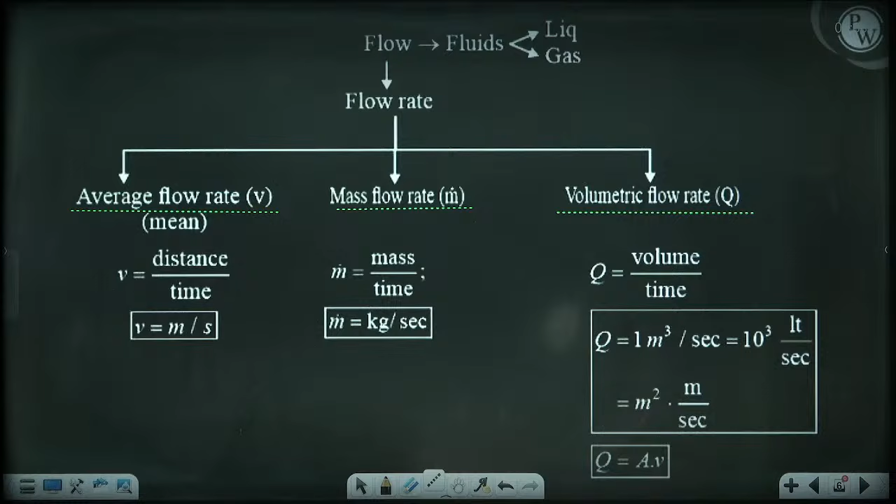Chalo, if you see the average flow rate, average flow rate ka units aayega distance per time, that is equal to meter per time, meter per second. Mass flow rate ka unit aayega mass rate, that is m dot, mass per time, kg per second. Volumetric flow rate ka units aayega how much volume is traveling per time, so that is V by t, that is meter cube per second.

So 1 meter cube per second is equal to how much? 10 to the power of 3 liters per second.

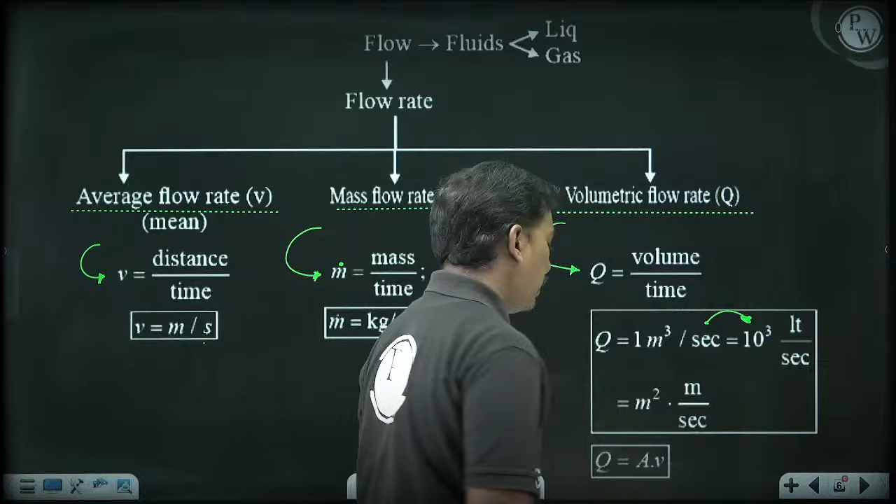So this quantity rate, I can write it as area into velocity. Q is equal to area into velocity.

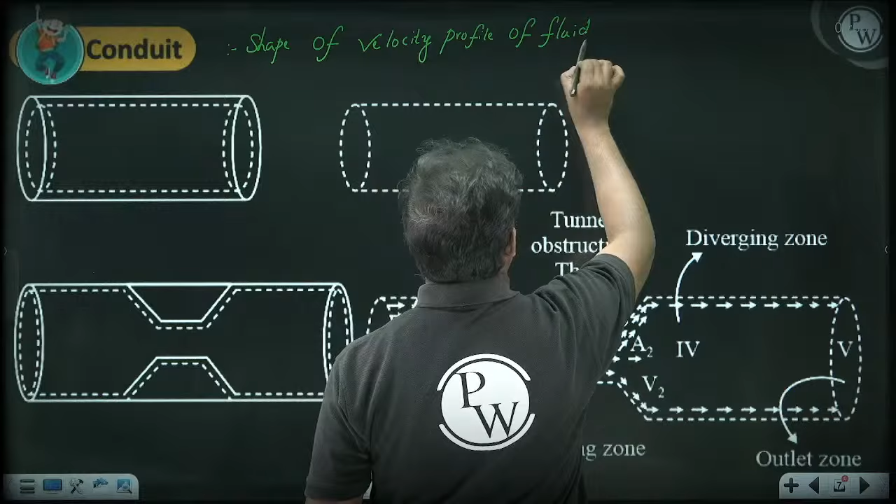So now let us take this conduit. What is conduit? Conduit is defined as shape of velocity profile, shape of velocity profile of the fluid, within the pipe or closed channel. So conduit means it is not the outward flow, it is an inside flow. In a pipeline, when the liquid is traveling, agar liquid ja rahe hain na, iske inside mein kaisa aapko shape dikhayega, usko hum bolte hain conduit.

So see here, inside is cylindrical. Now if you take a venturi type structure, agar venturi type structure dekho toh inside the fluid structure is like this. So from the outside it may look like cylindrical, but inside it looks like this. So this is a converging zone, this is what we call as inlet zone, and this converging zone, isko hum kya bolte hain? Converging zone bolte hain.

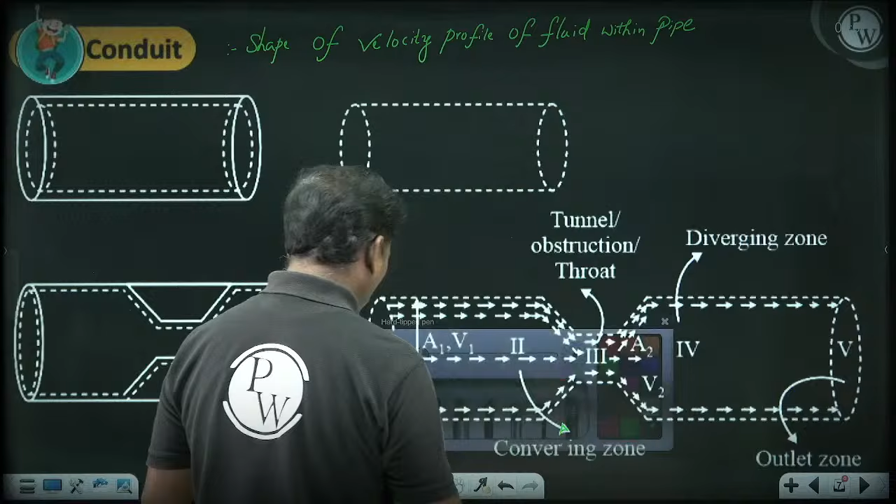Okay, next comes, this is tunnel or obstruction. Then this is what we call as diverging zone. So these are the major things. That means in a conduit the appearance will be cylindrical from the outside, but if you see inside it will be having like this.

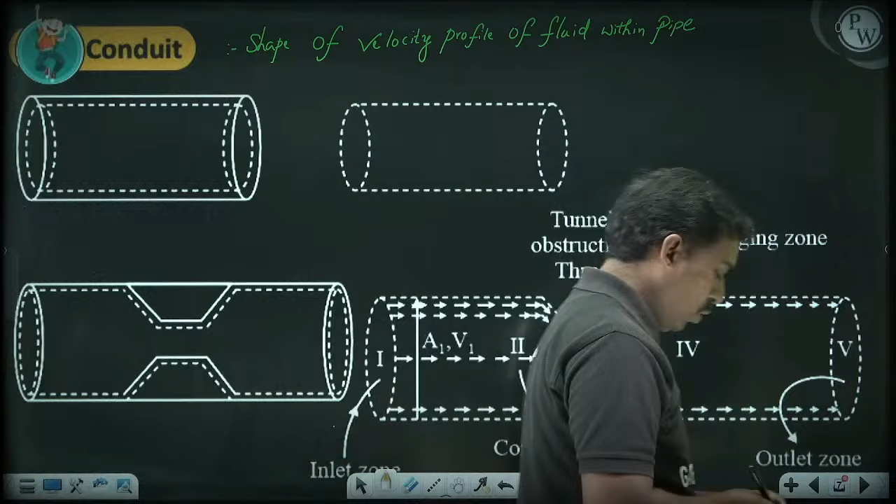Noted? Chalo, so this is the situation of the conduit. So conduit is having the inlet zone, there is a converging zone, there is obstruction zone, there is a diverging zone, there is outlet zone.

Now this is a laminar flow. You see the laminar flow. In the laminar flow, the fluid which is traveling at the walls will be having the less velocity, but the fluid which is traveling at the center will be having the high velocity.

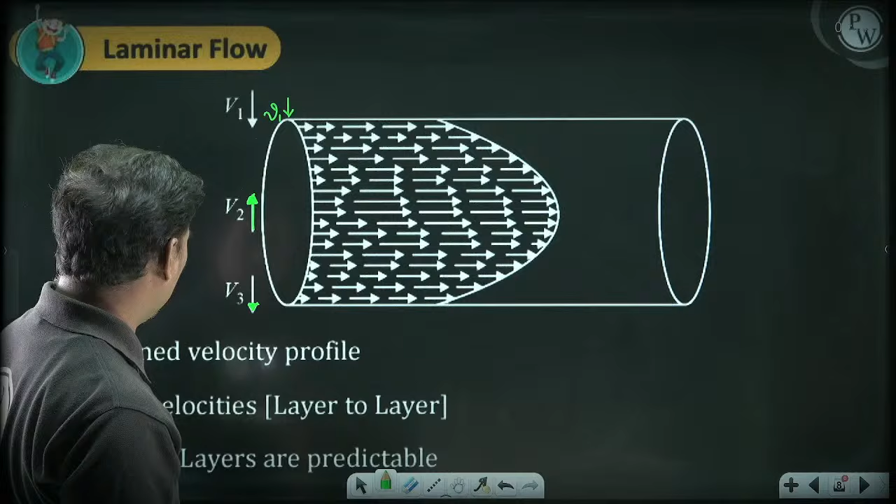This is what we call a disciplined velocity profile. There is a defined velocity layer to layer, so the velocities of the layers are predictable. That type of fluid we call laminar flow. In laminar flow we can predict where the fluid flow is less, where it is more, how it behaves at the center - we can check it completely.

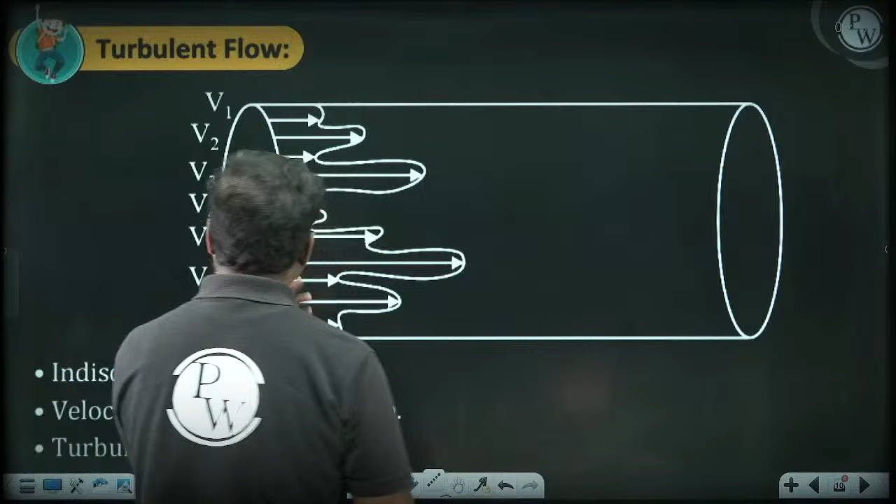Next comes the turbulent flow. In turbulent flow there is no discipline from top to bottom - it's an indisciplined velocity profile. When you press that pipe or a disturbance is created in it, an indisciplined velocity profile gets created. That type of indisciplined velocity profile we call turbulent flow. So disturbed, indisciplined velocity profile is called turbulent flow.

So velocities are unpredictable, and turbulence can be mentioned like this.

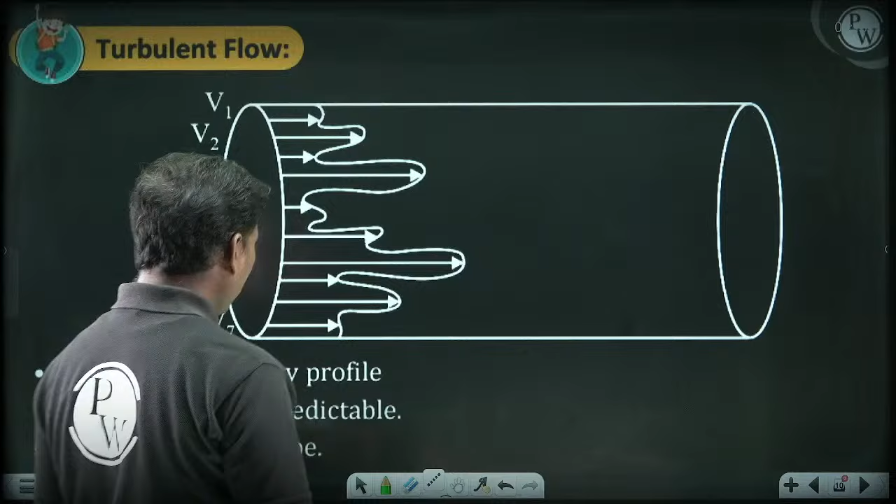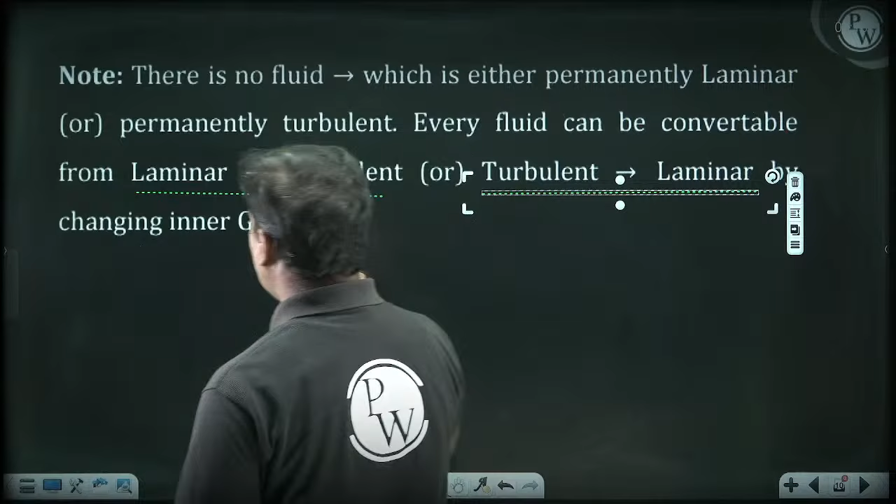Actually speaking, there is no fluid which is permanently laminar, and no fluid which is permanently turbulent. Every fluid can be converted from laminar to turbulent or turbulent to laminar by changing the inner geometry of the pipe. There is no fluid which is either permanently laminar or permanently turbulent.

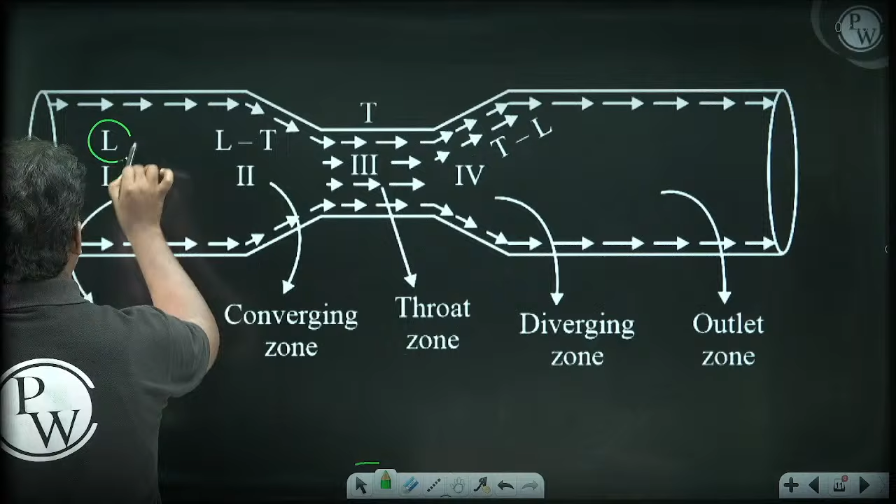Now let's see how it changes. This is the inlet zone, this is the converging zone, this is the throat zone, this is the diverging zone, and this is the outlet zone. Here the fluid is laminar, here it is in the process of converting from laminar to turbulent, here it has become turbulent, here it is converting from turbulent back to laminar, and finally it becomes laminar here. So these are the zones: inlet zone, converging zone, throat zone, diverging zone, and outlet zone.

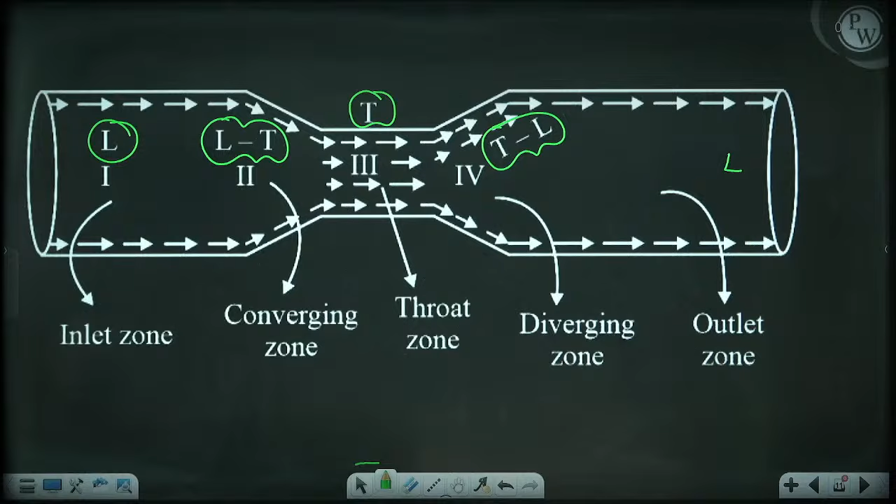Now, Reynolds number - what is Reynolds number? Reynolds number is a number by which the fluid characteristics are determined. It is a characteristic function of a fluid, by which it can be determined and distinguished whether the given liquid is laminar or turbulent. A fluid can be either laminar or turbulent.

If Reynolds number is less than 2000, the fluid is called laminar. If Reynolds number is between 2000 to 4500, the fluid is in the process of converting from laminar to turbulent. If Reynolds number is greater than 4500, it has become turbulent. If Reynolds number is greater than 10 power 5, it has become highly turbulent. These are the characteristics - please make a note of all these points.

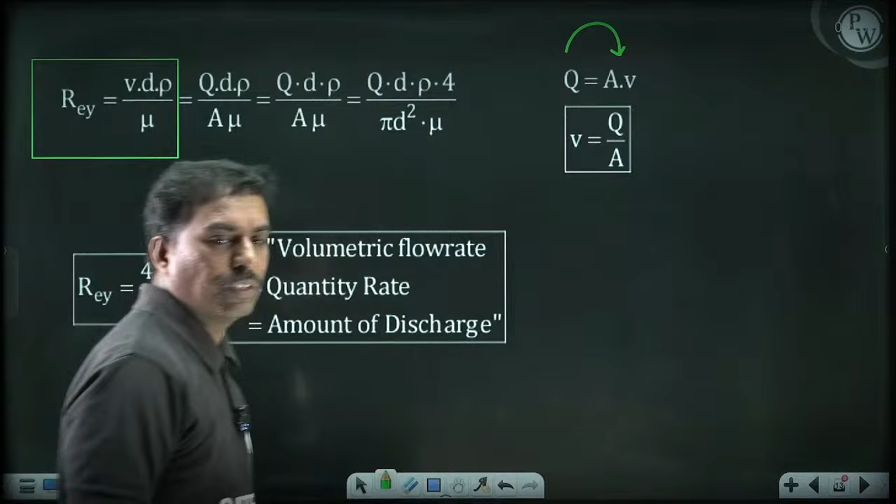Now let's move to this. The Reynolds number formula is given by V d rho by mu. We can write Q is equal to area into velocity, so velocity can be determined as Q by A. Area can be written as pi d square by 4. So this is Q, this is A.

So Q by A gives us V d rho by mu, where A is equal to pi d square by 4. So 4 comes to the top, giving 4Q, and one d gets cancelled. So we get 4Q rho by pi mu d.

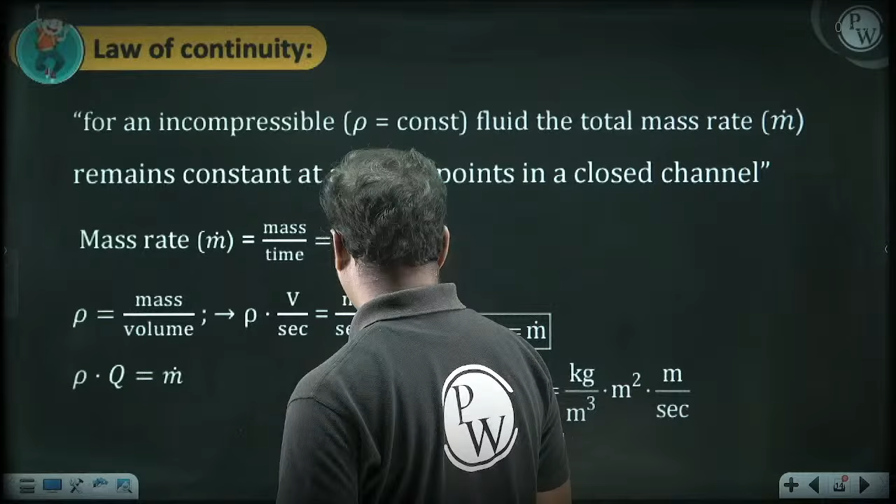Next comes the law of continuity. What is the law of continuity? It tells us that for an incompressible fluid, the density remains constant. So for incompressible fluid, the density remains constant, and the total mass rate remains constant at any two points in a closed channel.

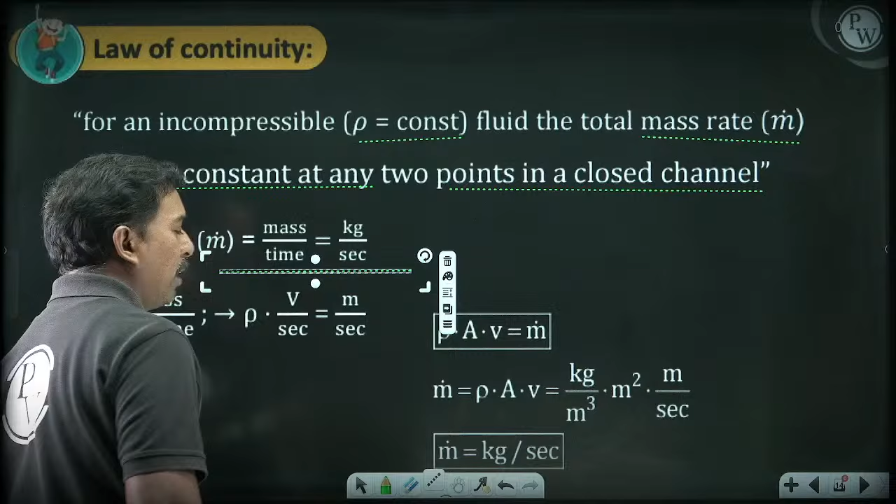The mass rate is given by the formula mass per time, which means kg per second. So how much mass per time? We know density is equal to mass by volume.

Density into volume is equal to mass. If we divide by per second, volume per second is equal to Q, and mass per second is equal to m dot. So rho into Q, I can write as m dot, which is called the mass rate.

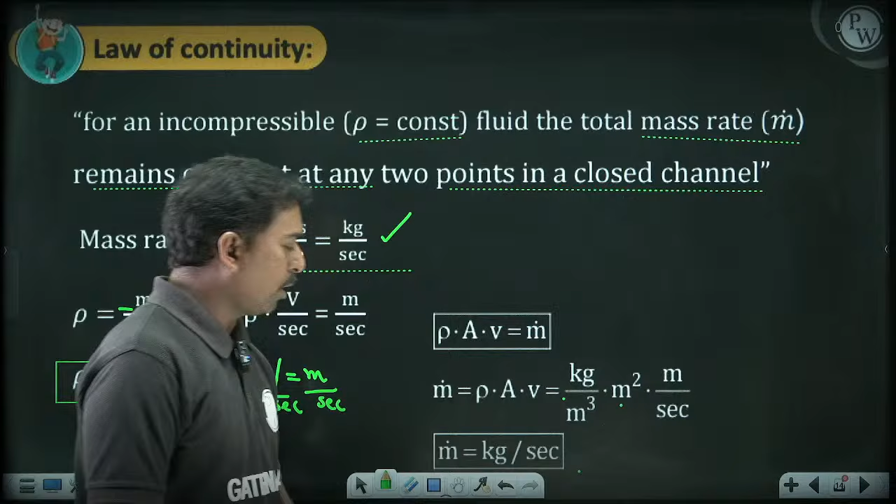Q means area into velocity, so m dot is equal to rho into A into v. Density is kg per meter cube, area is meter square, velocity is meter per second, so the units come out as kg per second. This unit for mass rate is very important in this topic, units and dimensions are very important.

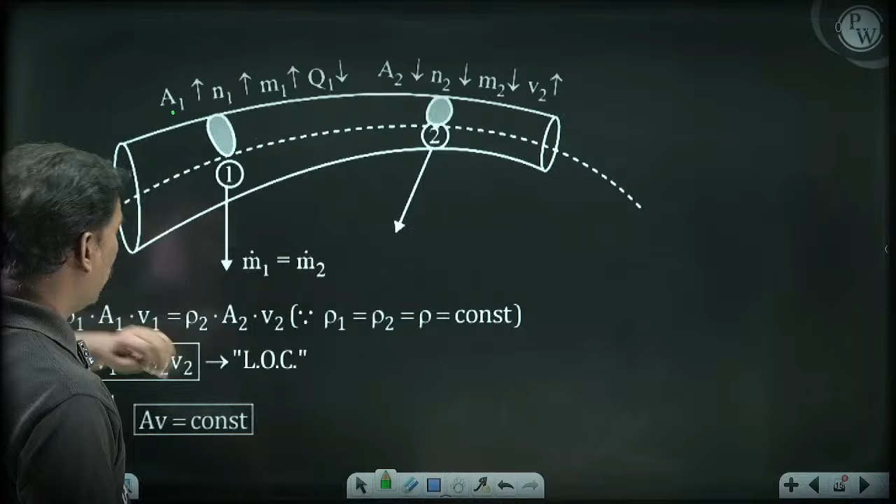So the total mass rate remains constant. If you see this diagram, please note it down: for any incompressible fluid, the total mass rate remains constant at any two points. At this point it is m1 dot, at this point it is m2 dot. Here area is more, so the number of particles occupied will be more, so mass will be more.

So when mass is more, velocity will be less. This is the velocity here, so velocity will be less. Next, here area is less, so the number of particles occupied will be less, mass is less, and velocity will be more.

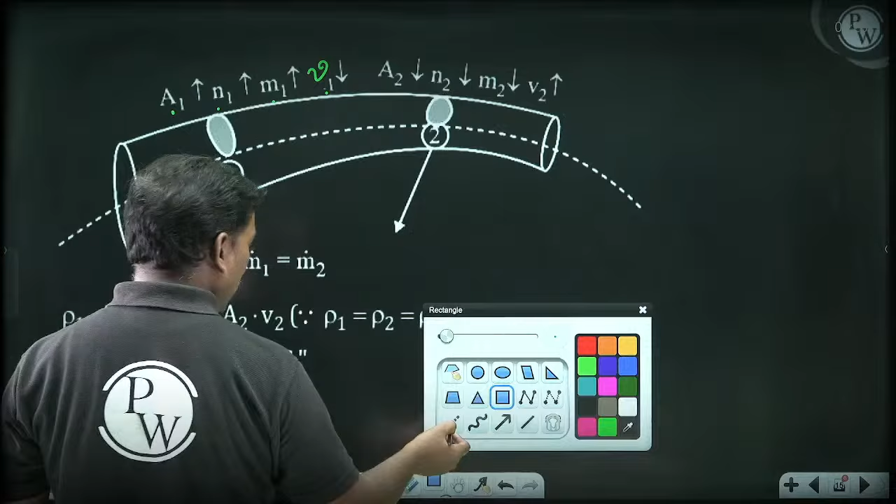So m1 dot is equal to m2 dot, meaning rho1 A1 v1 is equal to rho2 A2 v2. As the density remains constant, I can write A1 v1 is equal to A2 v2. This is what we call the law of continuity: velocity is inversely proportional to area. Please make a note of this point, it's one of the important principles in fluid dynamics, and what it tells us is very very important.

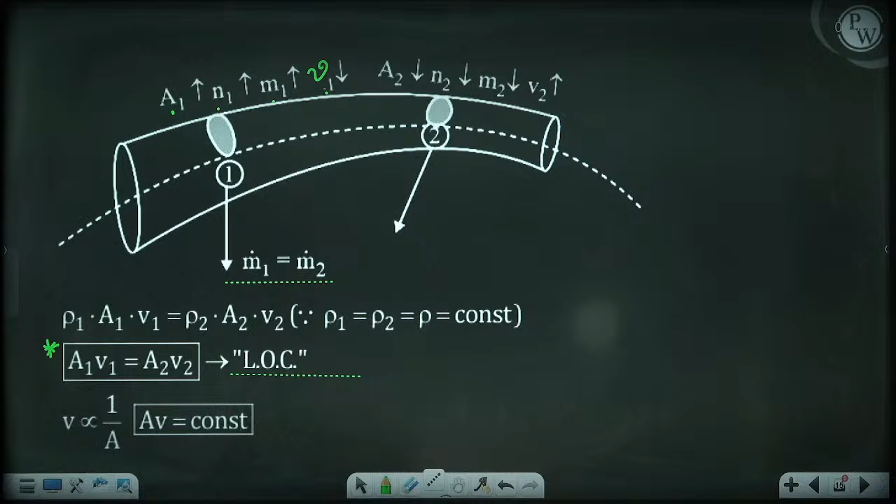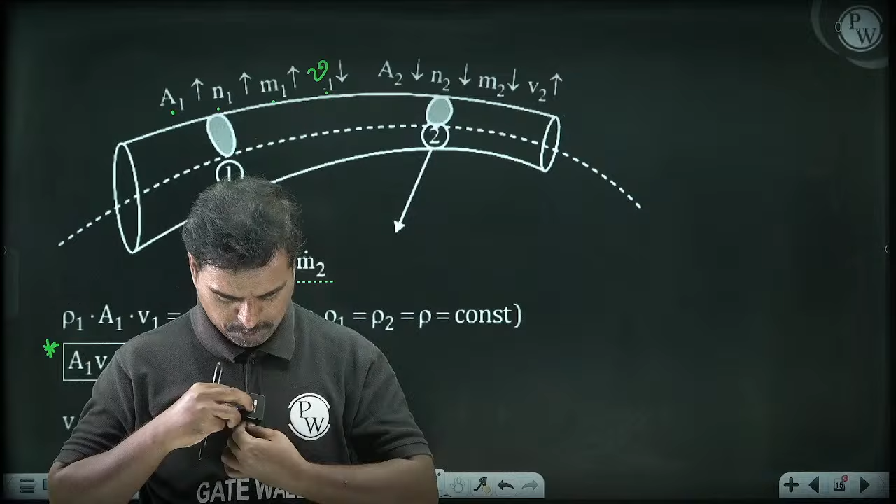It's not only for your GATE exam, it's also for university level exams, and you can also use it for interviews.

So velocity is inversely proportional to area, area into velocity is equal to constant. Next, Bernoulli's principle. For an incompressible fluid where rho is constant, the total internal energy remains constant. What is this total internal energy? It is the algebraic sum of potential energy, kinetic energy, and pressure energy at those respective points: mgz plus half mv square.

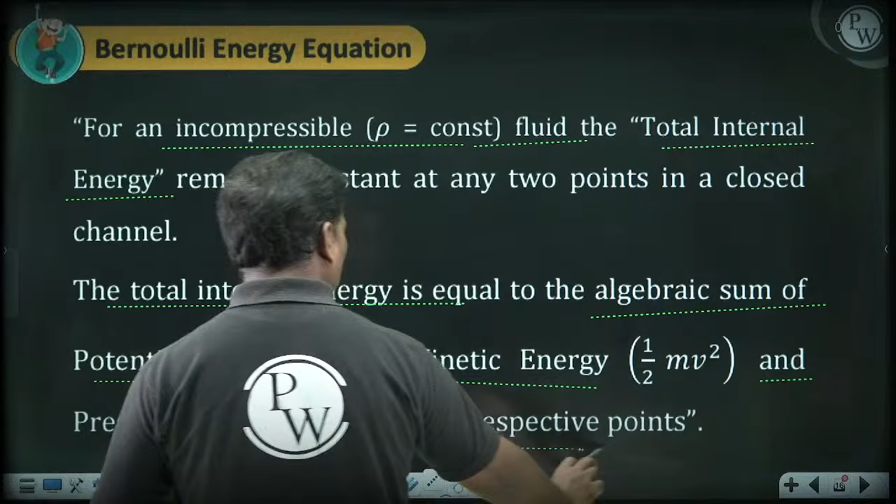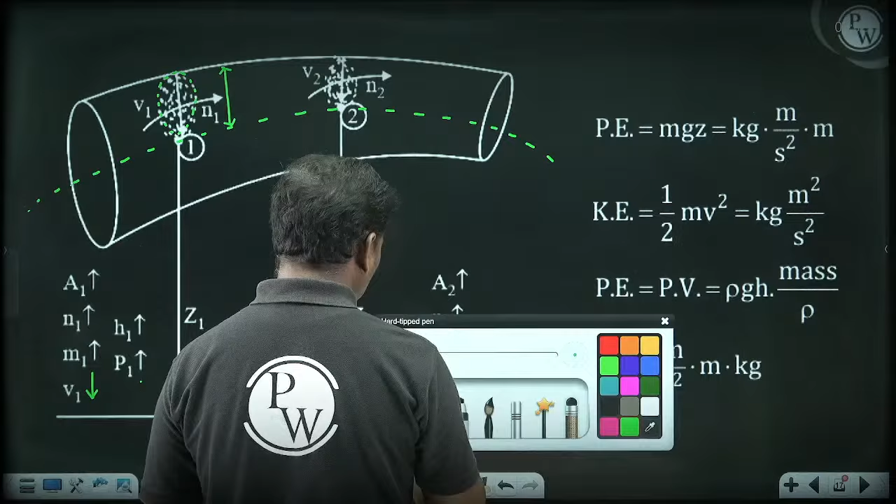Next here, area is less, number of particles will be less, mass will be less, and velocity will be higher. So the lower the height, the lower the pressure will be. Please try to understand these relations, in fluid dynamics this relation is very important: less height, less pressure.

The potential energy formula mgz is based upon its height. m is in kg, g is in meter per second square, z is in meters, so the units come out as kg meter square per second square.

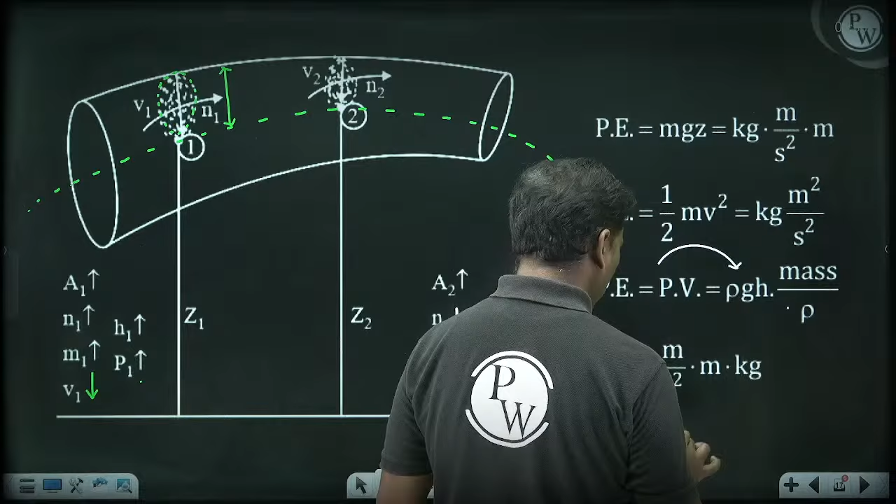Kinetic energy is equal to half mv square, units kg meter square per second square. Pressure energy is equal to pressure into volume. Pressure is equal to rho gh, volume is equal to mass by rho, so rho gets cancelled. So for everything, the units are common: kg meter square per second square.

So total internal energy at 1 is equal to total internal energy at 2. Total energy at 1 is potential energy at 1 plus kinetic energy at 1 plus pressure energy at 1, equal to potential energy at 2 plus kinetic energy at 2 plus pressure energy at 2. Potential energy at 1 is m1 g z1, kinetic energy is half m1 v1 square, pressure energy is pressure into volume 1. Similarly, potential energy 2 is m2 g z2, kinetic energy half m2 v2 square, pressure energy is pressure into volume 2.

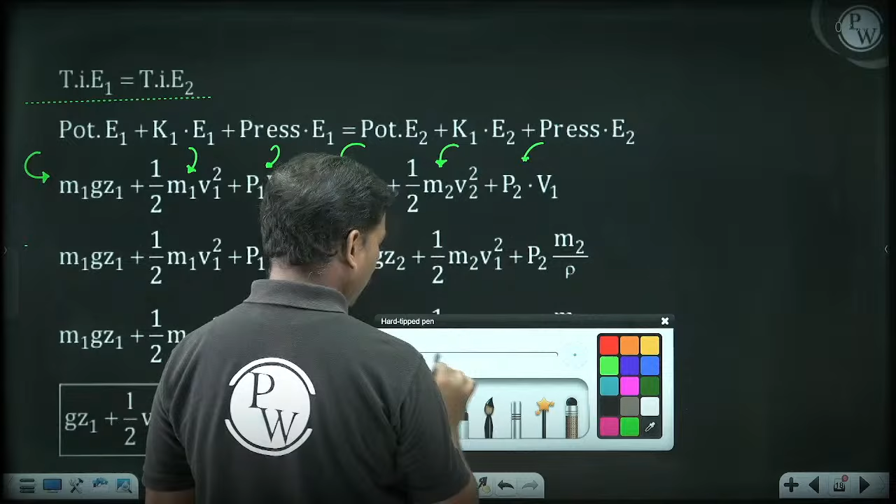So we have m1 g z1, half m1 v1 square. Density is equal to mass by volume, so volume is equal to mass by rho. Similarly for state 2: m2 g z2, half m2 v2 square. This is Bernoulli's principle in physics, with p2 m2 by rho. So everything is coming together like this.

Now if I divide everything with time in seconds, this term becomes m1 dot, the mass rate, and this also becomes m1 dot. Similarly these become m2 dot. So m1 dot is equal to m2 dot, meaning the total mass rate remains constant.

So g z1 plus half v1 square plus p1 by rho is equal to g z2 plus half v2 square plus p2 by rho. This is the short form of Bernoulli's energy equation. Please make a note of these points - Bernoulli's energy equation.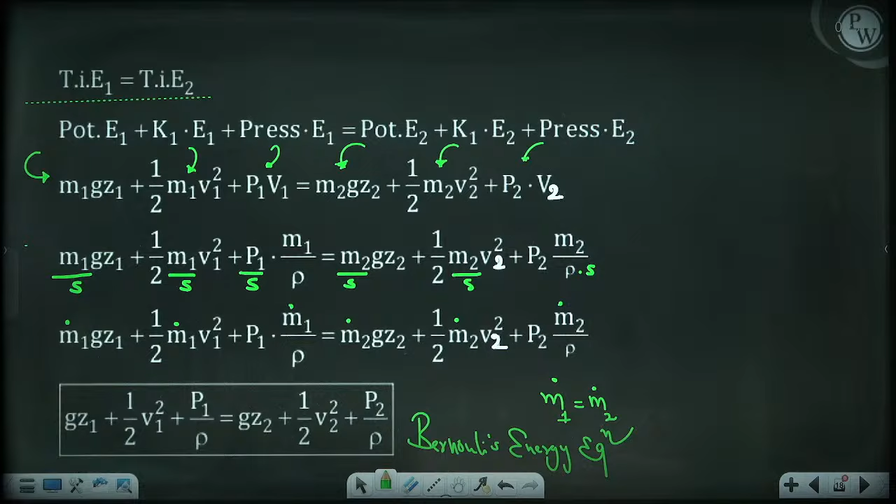That is the short form. This is the short form.

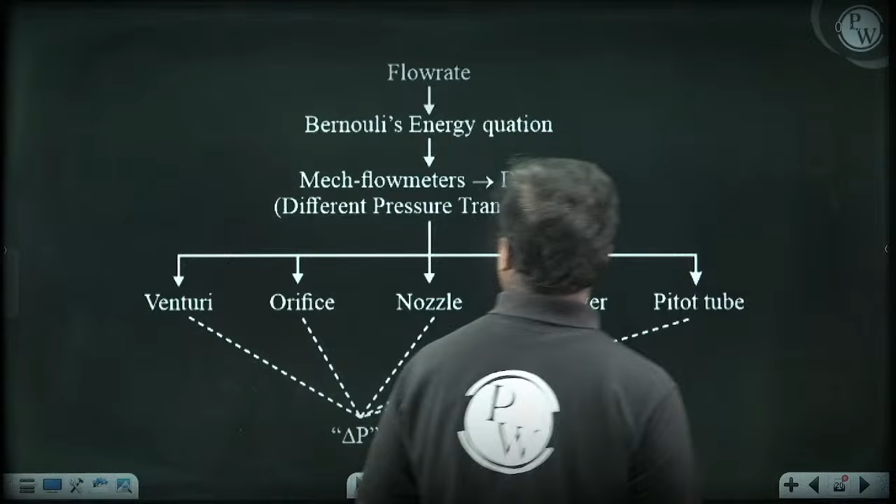Now, based on this Bernoulli's equation, we have certain flow meters. These flow meters are called mechanical flow meters because there is a pressure concept involved. These mechanical flow meters are also called DPTs, which stands for differential pressure transmitter. Because of the differential pressure, the liquid travels from one location to another. That's why we call them DPTs.

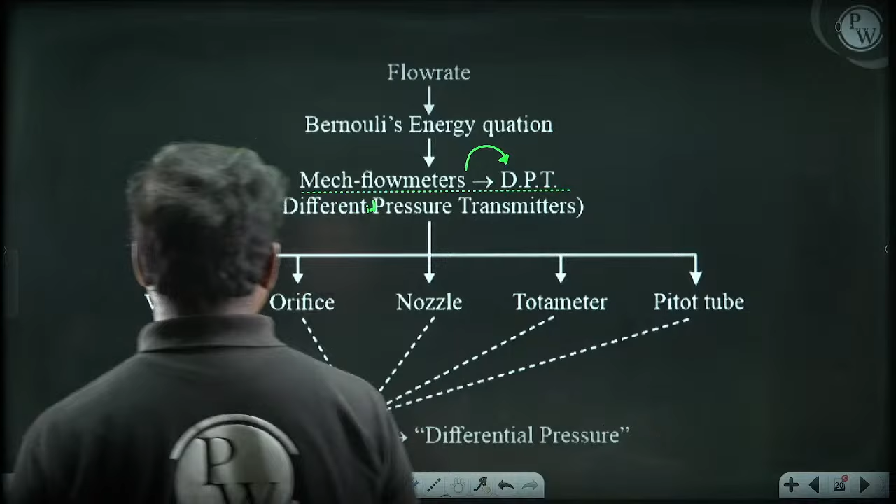These differential pressure transmitters can be categorized like this: venturi meter, orifice meter, nozzle meter, rotameter - this is what we call a rotameter - and pitot tube. So these are the flow meters: rotameter and pitot tube.

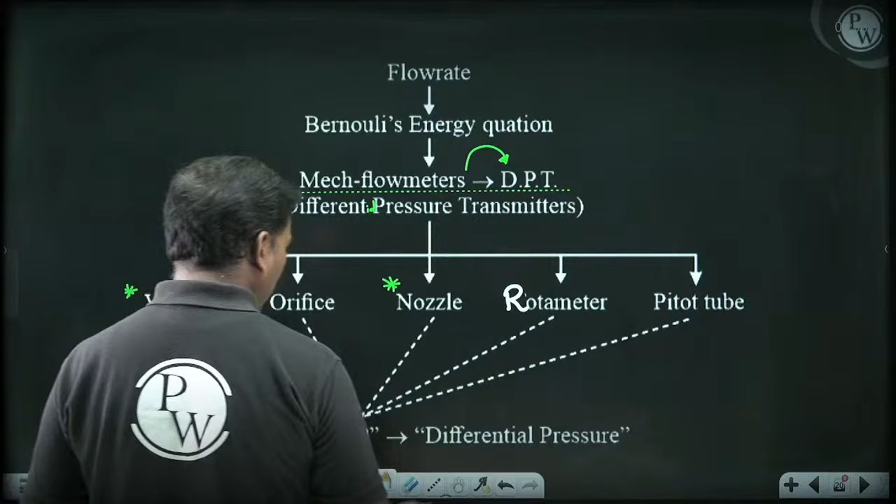So venturi, orifice, nozzle, rotameter - for these, differential pressure is the concept. They all work on differential pressure, so these are called mechanical flow meters. It's indirect flow measurement, because if you need to measure the flow rate, you have to measure delta P instead. So try to understand that it's indirect.

So now let us move to the next context of these mechanical flow meters. I told you about the different types of flow meters now. Let us go step by step through the different types of flow meters.

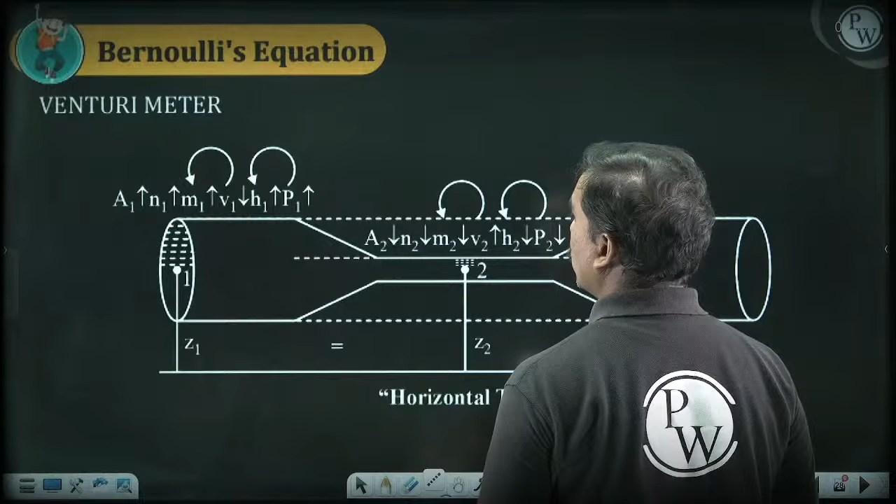This was our Bernoulli's equation. Now let us go for the venturimeter diagram. If you see the venturimeter diagram, it will look like this - a tunnel with a divergence like this, and then it continues like this. This is the inlet, this is the outlet. So this is the fluid flow rate.

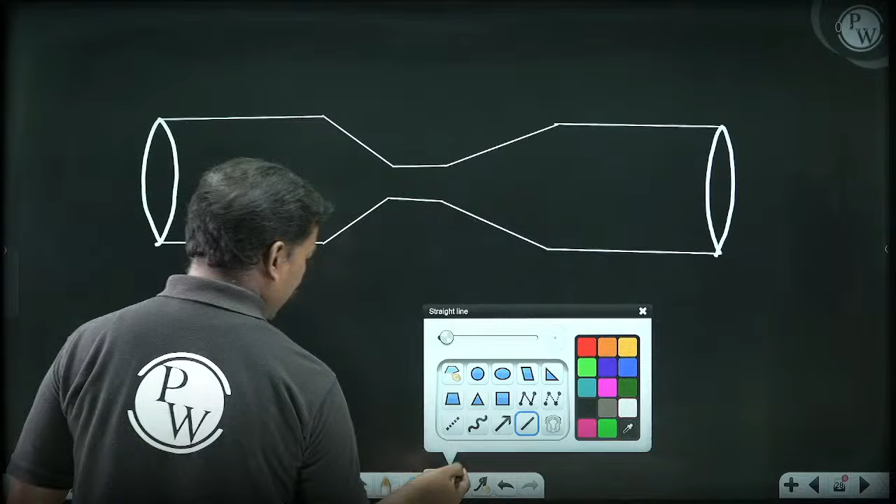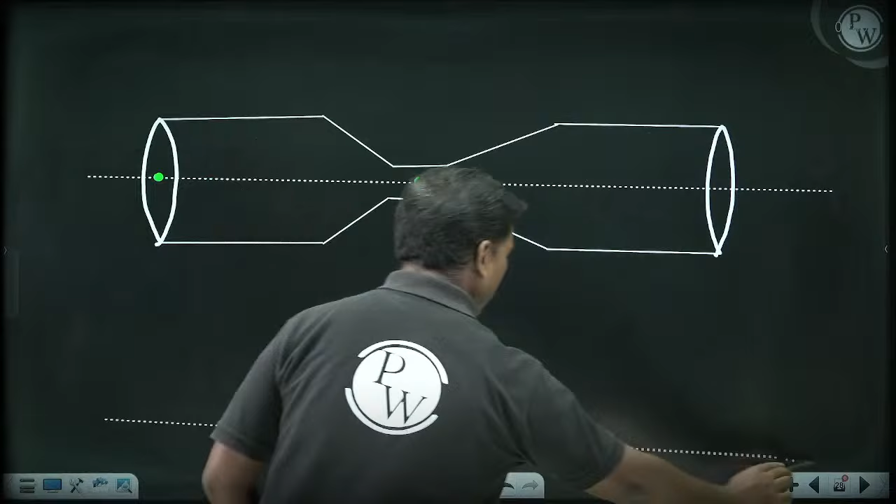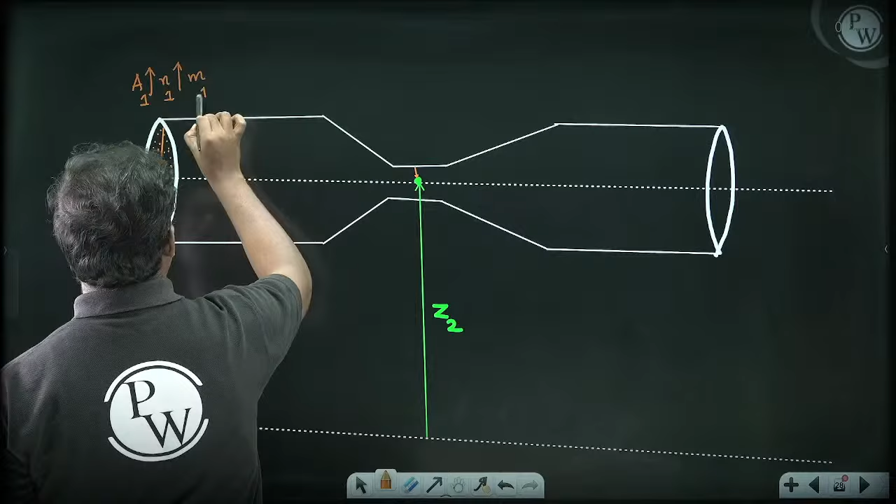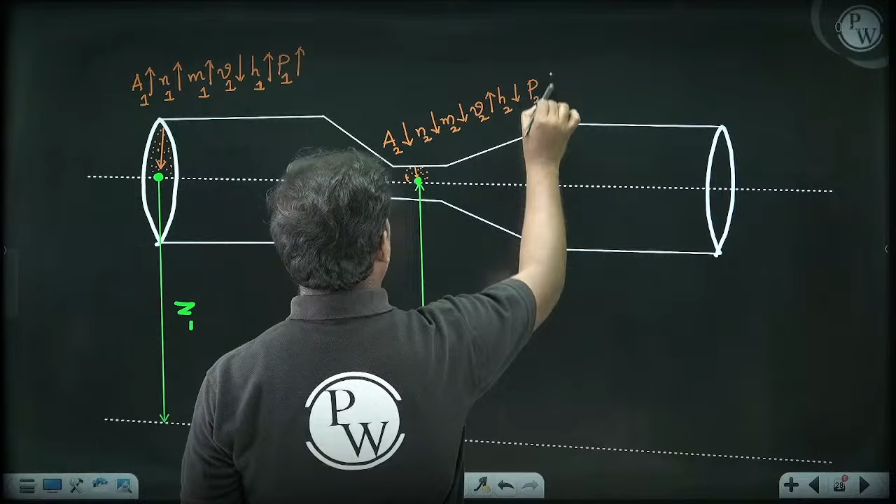I'm taking this point as point 1 and this as point 2. From the horizontal, this particular height is Z1, this particular height is Z2. Taking these as particles, at this height we check: area 1 is more, number of particles is more, mass is more, velocity will be less, height is more, pressure is more. But here, area 2 is less, number of particles occupied is less, mass is less, velocity will be more, height is less, so P2 is less. Please make a note of this structure.

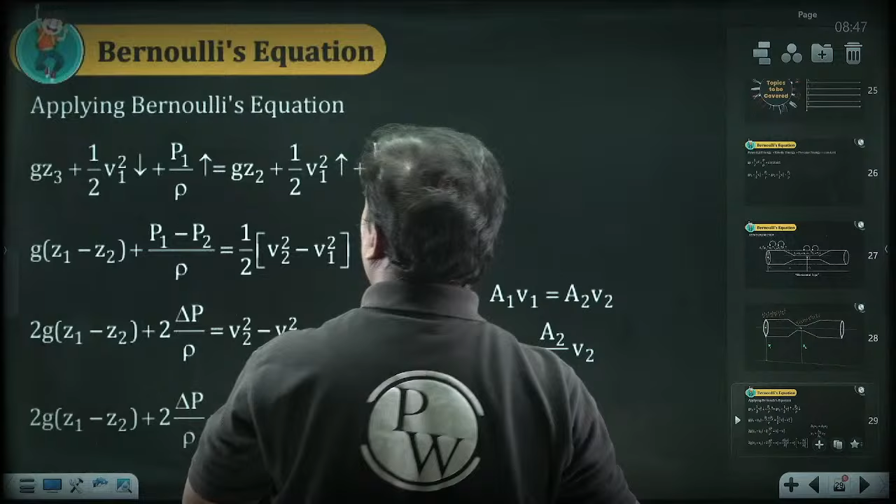So this is the complete equation. What I have written is GZ1, V1 square by 2 plus P1 by rho, equals GZ2 plus half V2 square plus P2 by rho.

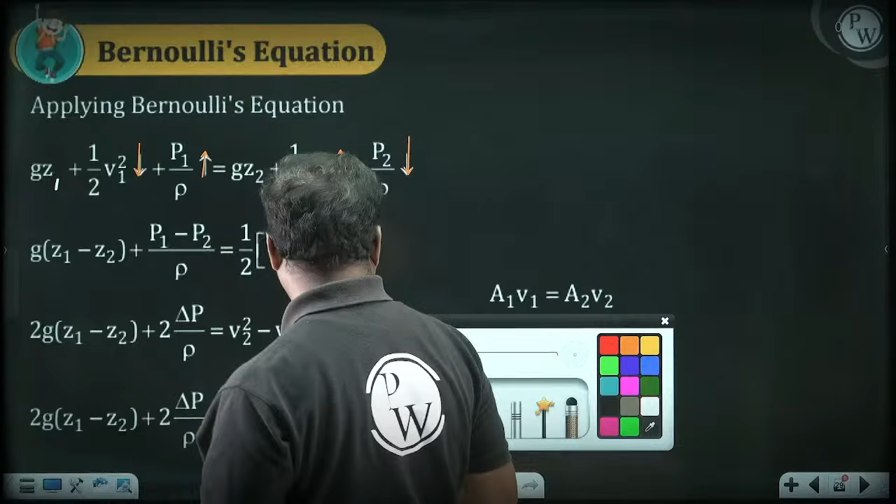So V1 is less here, V2 is more, P1 is more, P2 is less. So if I take Z1 minus Z2 off, G into Z1 minus Z2 plus P1 minus P2 by rho equals half V2 square minus V1 square. If I take 2G Z1 minus Z2, it becomes 2 delta P by rho plus V2 square minus V1 square.

So A1 V1 equals A2 V2, so V1 equals A2 by A1 into V2. I want to convert V1 also into V2, because we are interested in the flow rate at the throat side. So 2G Z1 minus Z2 I have written.

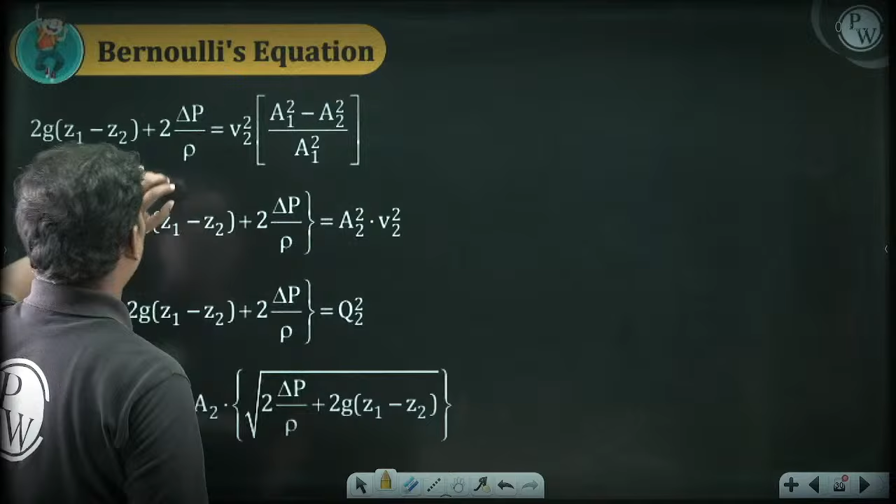I am multiplying both sides with A2 square. So this becomes A1 square A2 square by A1 square minus A2 square into 2G Z1 Z2 plus 2 delta P by rho. This is Q2 square. So Q2 can be written as, taking the square root, A1 by square root of A1 square minus A2 square, into A2, square root of 2 delta P by rho plus 2G Z1 minus Z2.

So this is what we call the volumetric flow rate. So Q2 can be taken as A1 by square root of A1 square minus A2 square into A2, square root of 2 delta P by rho plus 2G Z1 minus Z2. This first term I will take as the velocity approach factor.

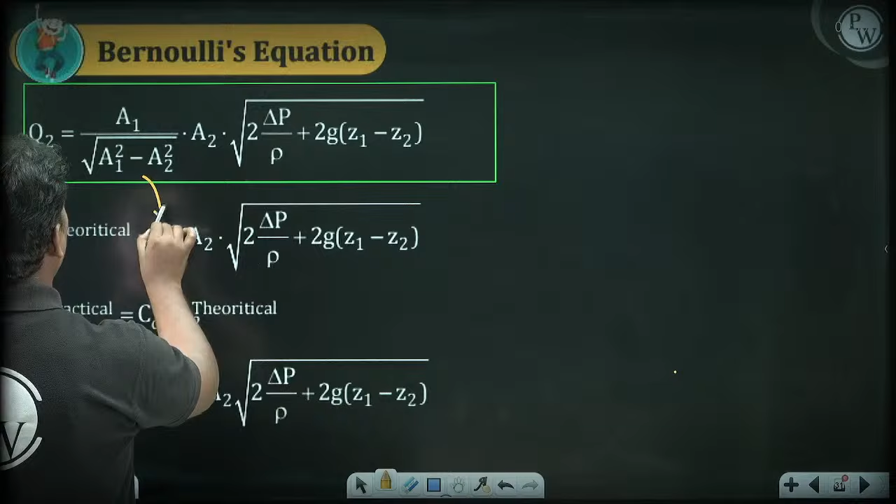So what is this M? M can be taken as A1 by square root of A1 square minus A2 square. That is the M, and this is the A2.

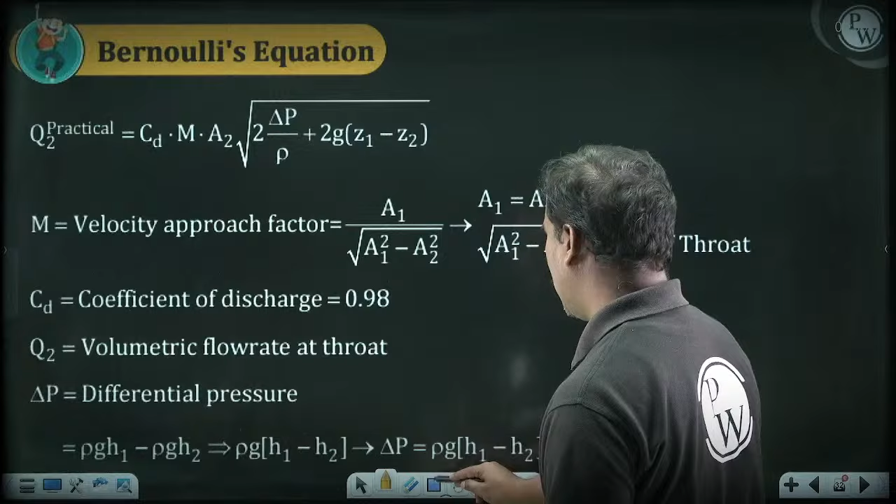So this is the theoretical expression, but practically we have to take the coefficient of discharge CD into Q theoretical. So Q2 theoretical I am taking as M, A2, square root of 2 delta P by rho plus 2G Z1 Z2. Finally, this is the practical expression. Please make a note of these expressions.

M is called the velocity approach factor, and CD is the coefficient of discharge. So please consider this and make a note of it.

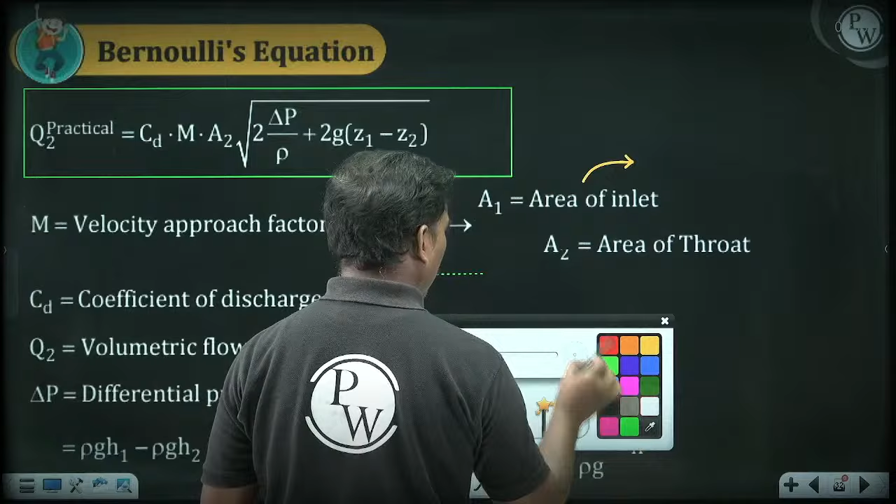Now CD is the coefficient of discharge, that is 0.98. Q2 is the volumetric flow rate at the throat. Delta P is the differential pressure, so delta P I can write as P1 minus P2, rho G H1 minus rho G H2. If I take rho G out, H1 minus H2 is coming. So ultimately, CD is called the coefficient of discharge.

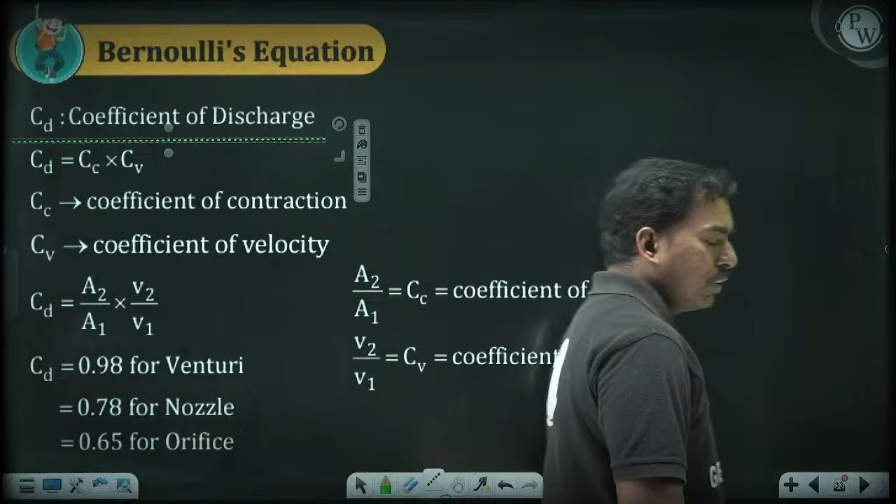Coefficient of discharge can be written as CC and CV, that is coefficient of contraction and coefficient of velocity. Coefficient of contraction is A2 by A1. Coefficient of velocity is V2 by V1.

CD is equal to 0.98 for venturi, 0.78 for nozzle, 0.65 for orifice. So please make a note of these points: coefficient of contraction is A2 by A1 and coefficient of velocity is equal to V2 by V1.

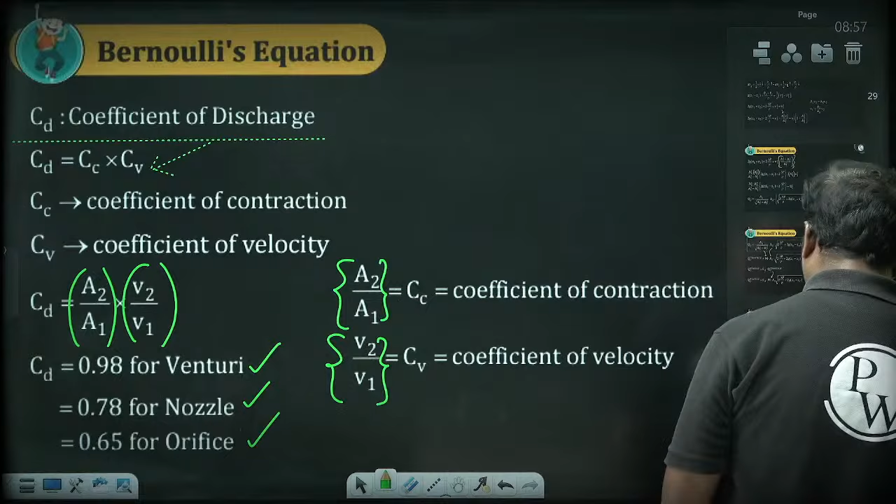Next, Bernoulli's equation. The basic relation is that the volumetric flow rate happening at the throat is directly proportional to the square root of differential pressure. So Q2 is proportional to square root of delta P. So Q2 dash by Q2 double dash is equal to root over delta P1 by delta P2. So what are the advantages?

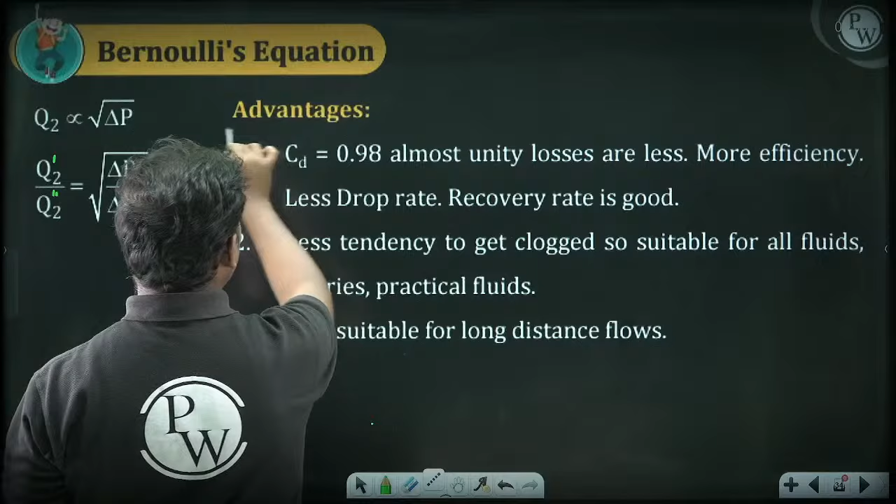Coefficient of discharge is 0.98, almost unity, that means losses are less, more efficiency, less drop rate, recovery rate is good. Next, less tendency to get clogged, so suitable for all types of fluids, slurries and practical fluids. Next, best suitable for long distance flows. Venturimeter is lengthy, so it is best suitable for long distance flows.

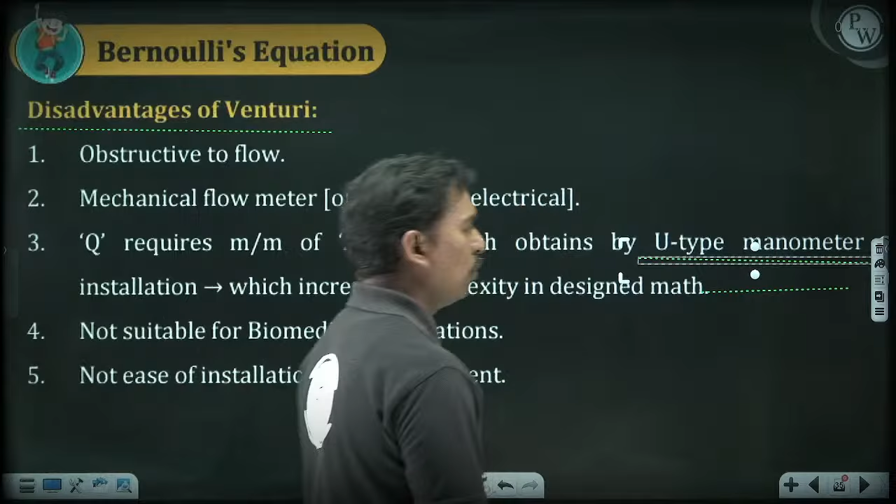But the disadvantage of venturi is this: it is obstructive to the flow, a mechanical flow meter, and requires compulsory delta P measurement. It is not direct, so we have to use a manometer. Once you keep the manometer, the mathematical complexity increases. So it is not suitable for biomedical applications - you cannot insert the venturimeter in biological applications.

Not ease of installation and replacement. It's not that easy.

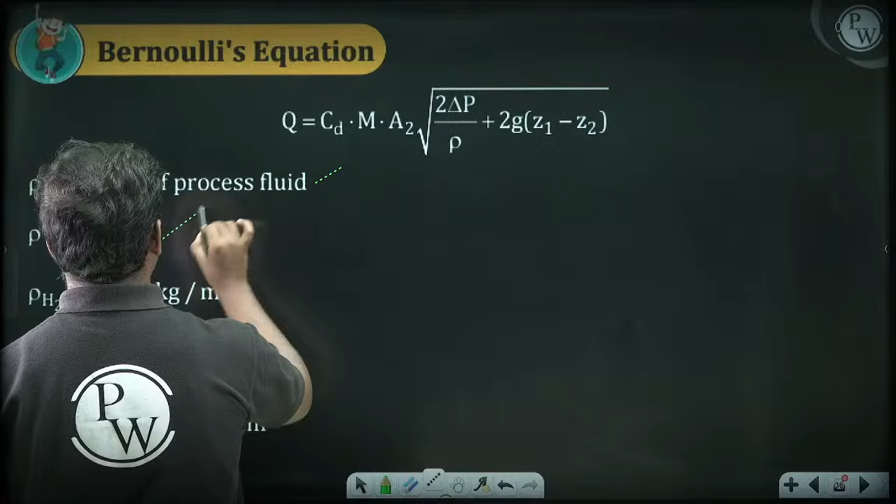So now these are the formulas: CD into A2 square root of 2 delta P by rho, plus 2G into Z1 minus Z2, where rho is the density of the process fluid, density equals mass by volume. Density of water is 1000 kg, density of oil is 900, density of mercury is 13,600, density of seawater is 1026, density of air is 1.026 kg per meter cube. Please make a note of all these points.

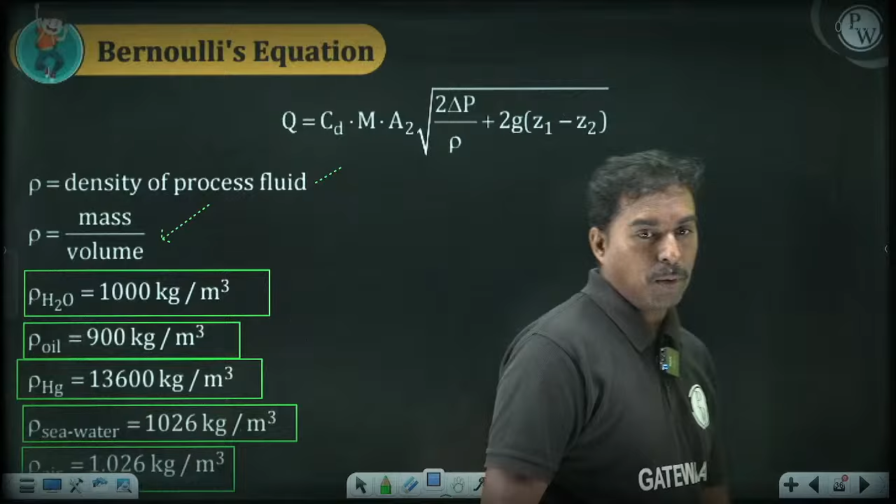Have you noted these values? These are the density values which will be useful for your numerical problems.

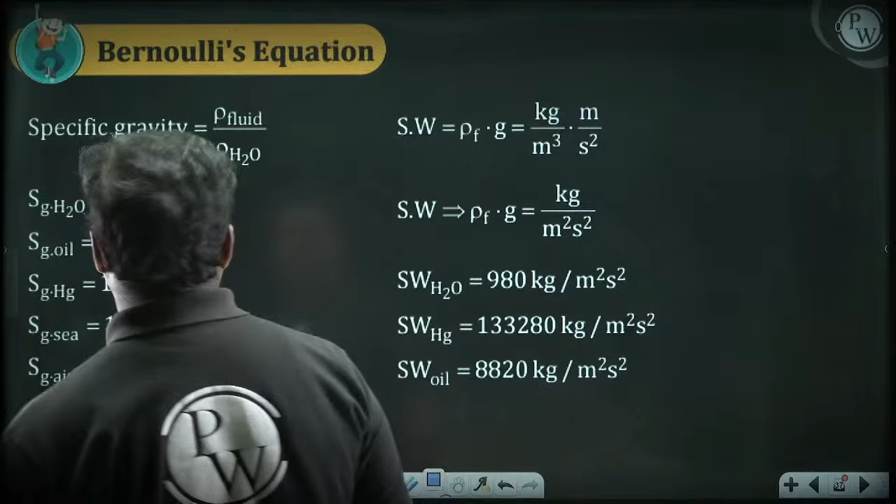Now let us see specific gravity. What is the definition of specific gravity? Specific gravity is defined as expressing density of the fluid with respect to density of water. That is what we call relative density, or specific gravity. Specific gravity of water is equal to 1.

Specific gravity of oil is 0.9. Specific gravity of mercury is 13.6. Specific gravity of seawater is 1.026. Specific gravity of air is 0.001026. So that is 1000 by 1000, 900 by 1000, 13,600 by 1000, 1026 by 1000, 1 by 1000, which gives us specific gravity.

Specific gravity does not have any units. It is also called relative density.

Now specific weight. What is specific weight? Specific weight is defined as rho into g. Rho is the density, density is mass by volume, kg per meter cube, and g is meter per second square. So specific weight is rho g, giving units of kg per meter square second square.

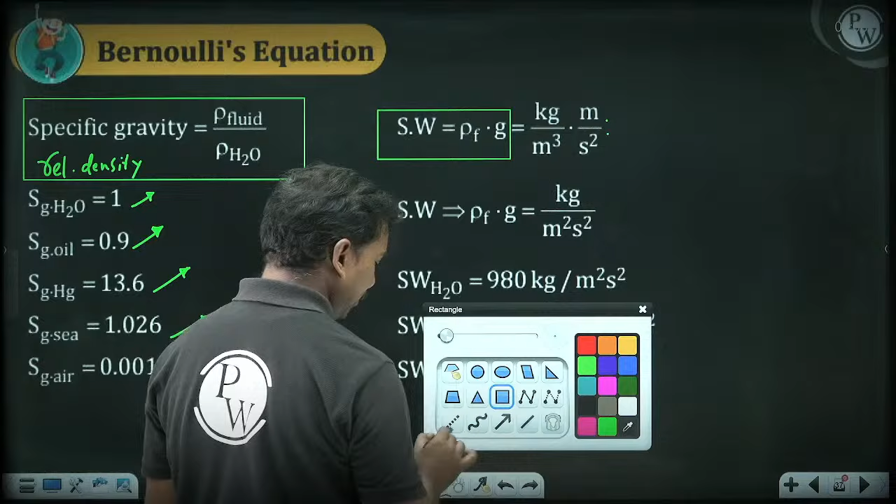Specific weight of water is 980. Specific weight of mercury is 133,280. Specific weight of oil is 8,820.

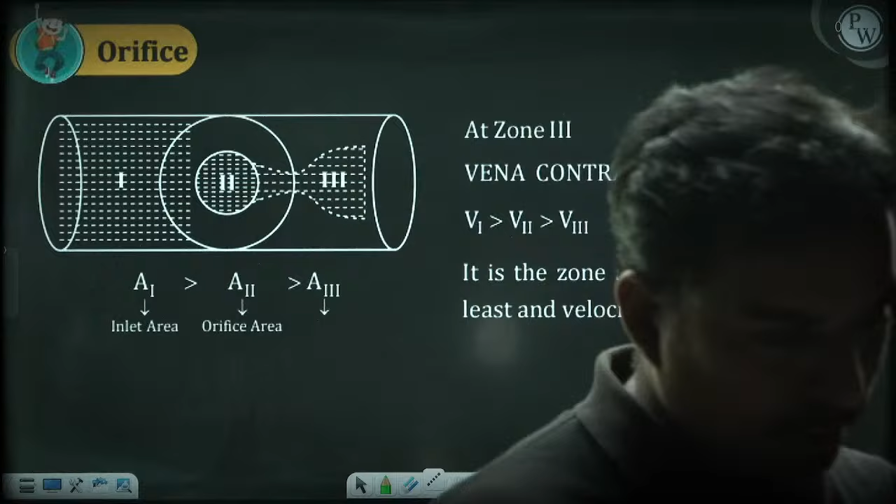Yes, Saranash. Merry Christmas, Merry Christmas. Thank you, thank you very much.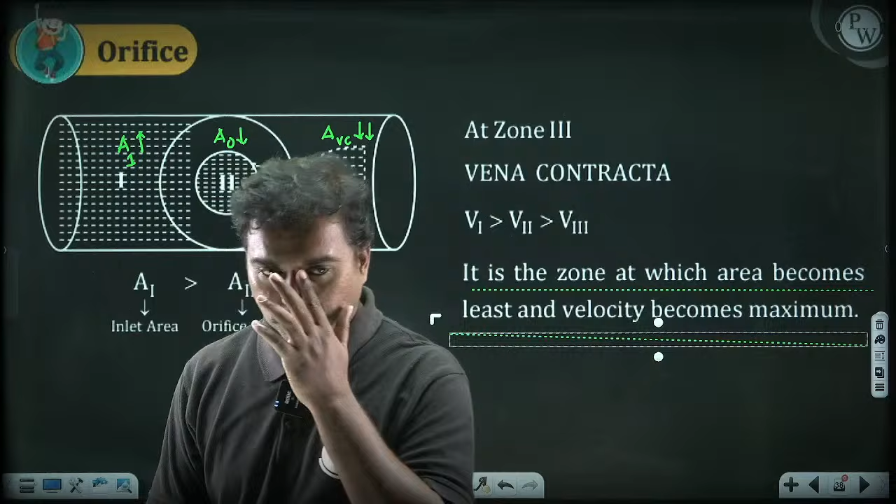This is the orifice meter. If you see the orifice meter structure, inside there is a circle and after that a small area. Here the area of the inlet is more, here the area of the orifice is less, and the area of this particular region called vena contracta is still least. It is a zone at which area becomes least and velocity becomes maximum. So this is the inlet area, this is the orifice area, and this is the vena contracta area, the zone where area becomes least and velocity becomes maximum.

So Q orifice is equal to CD into A2 square root of 2 delta P by rho, plus 2G into Z1 minus Z2. The orifice's coefficient of discharge will be equal to 0.65.

So what are the advantages? The advantages are smaller size, so ease of installation and replacement, best suitable for short length fluids.

Are you from instrumentation? Okay.

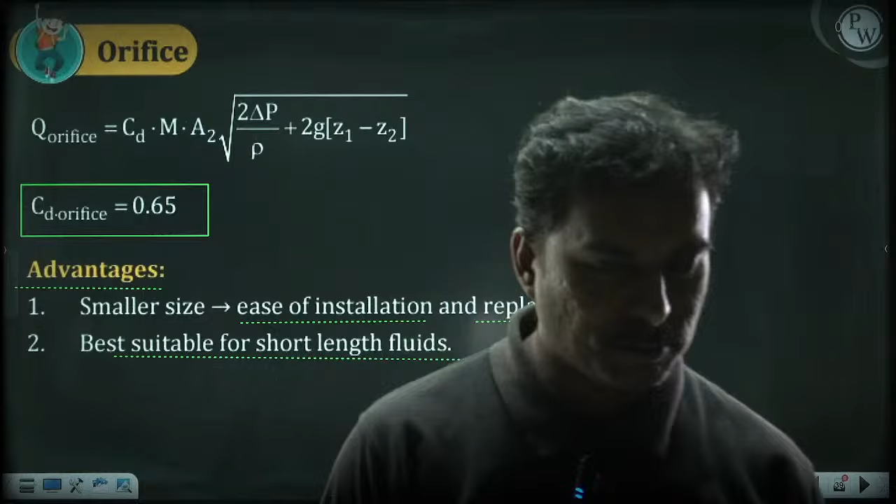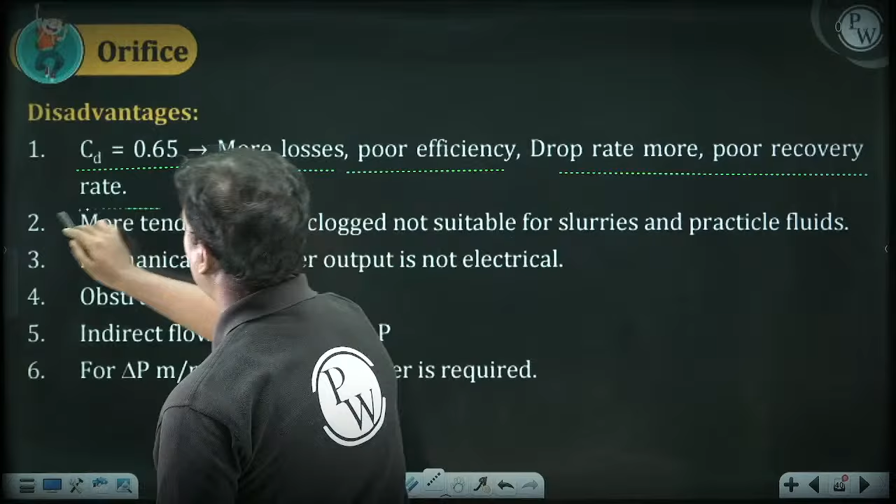Best suitable for short length fluids. Next, the most important thing, disadvantages. The disadvantages are also very high. Coefficient of discharge is 0.65 now, it is very least. So more losses, so poor efficiency, drop rate is more, poor recovery rate. Next, more tendency to get clogged, not suitable for slurries and particle fluids.

Why? Because there is an intersection part there, so this is what we call as particle fluids. Note down: it is a mechanical flow meter, output is not electrical, obstructive to the flow, indirect flow measurement. Why? Because we are not measuring the direct flow. For delta P measurement, a U-type manometer is required. Again, mathematical complexity and design complexity increase. So these all are the disadvantages.

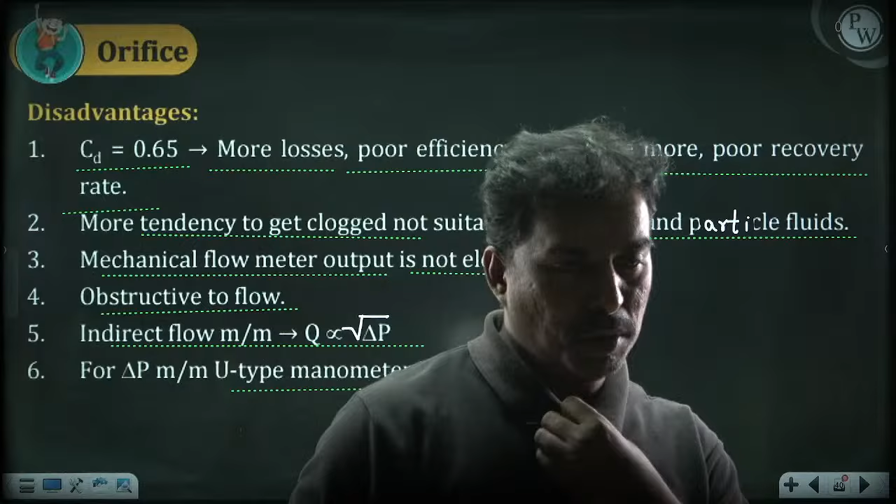Okay, so if you see this, a manometer is compulsorily required. Let us go for the next one.

Okay, so now please try to answer this question. Make it fast.

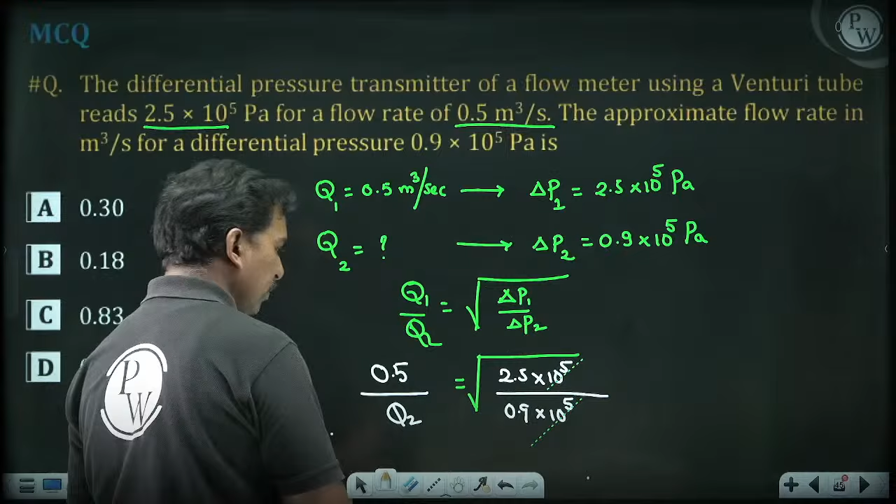What is the answer to this? The differential pressure transmitter of a flow meter using a venturi tube reads 2.5 x 10^5 Pascal for a flow rate of 0.5 meter cube per second. So when Q1 is 0.5 meter cube per second, the differential pressure is 2.5 x 10^5 Pascals. Next, for a differential pressure of 0.9 x 10^5 Pascals, what is the flow rate? So Q1 by Q2 equals square root of delta P1 by delta P2. Delta P1 is 2.5 x 10^5 divided by 0.9 x 10^5. Q1 is 0.5, Q2 is this. This gets cancelled, 25 by 9, which becomes 5 by 3. So Q2 equals 0.5 into 3 by... so Q2 will come as 0.3. So the right answer for this question is 0.30.

Anybody has done this question? Okay, sure, let us go for the next question. These are different types of questions, so please try to answer this one.

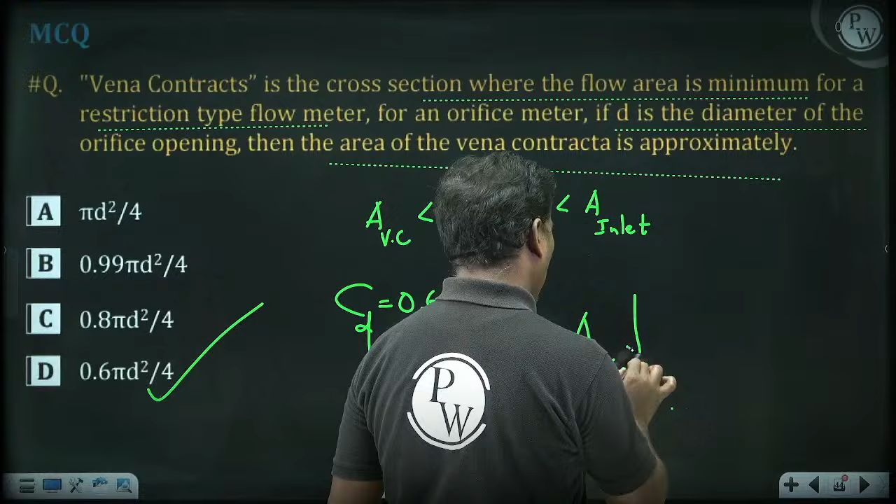Vena contracta is a cross section where the flow area is minimum, for a restriction type flow meter like the orifice meter, if D is the diameter of the orifice opening, then the area of the vena contracta is approximately dash. Always remember, area of the vena contracta will be lesser than area of the orifice, and that will be lesser than area of the inlet. So that is 0.6. The coefficient of discharge will be in the range of 0.65. So area at the vena contracta is least, and the velocity at the vena contracta will be higher, so that is approximately 0.6. Please note down: 0.6 times pi d square by 4.

Compared to the orifice opening it will be less, so it will be 0.6 pi d square by 4. Okay, let's go. Answer this question. Theoretical questions are very important with respect to the flow chapter.